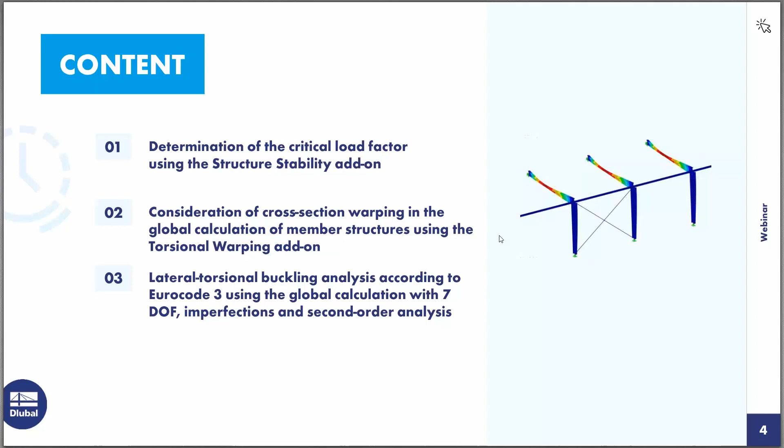So the first thing we want to look at is the structure stability add-on. Here's a short overview of its features. We can use the structure stability add-on to determine critical load factors for our structures and also calculate models consisting of member, shell, and solid elements. In this webinar, I'm going to present members in the structure stability add-on because we also want to show the combination with the 7 degrees of freedom calculation. I think shell elements and solid elements will be part of another webinar in the future.

Another feature of the structure stability add-on is the nonlinear stability analysis. We use incremental loading to also calculate nonlinear systems in the structure stability add-on. There's also an option which helps us determine the mode shape of an unstable model so that we can find the cause of the instability. We will also look at this in the webinar today. We can have a graphical representation of the stability mode shape and use it as a basis for determining the imperfections.

In the first example, I want to use a simple example in RFEM to show you the basics of the input for the structure stability add-on and also show which results we will get from the calculation with the structure stability add-on.

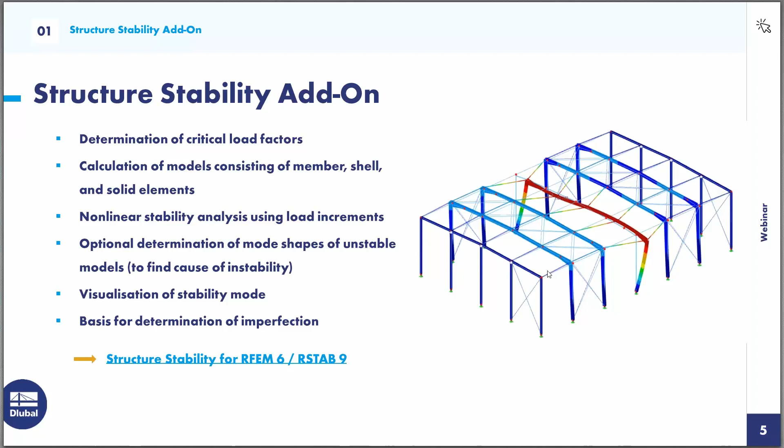So I will switch to RFEM and we will go through the first example. It's a very simple example in this case - a simple steel frame with rigid frame edges and simple supports. Now we have one loading condition: vertical loading and a horizontal load. We want to look at all the settings necessary to perform a stability analysis with the structure stability add-on for this example.

First, if you want to use the structure stability add-on, we need to activate it in the base data dialog. So I go into the edit model base data dialog, and we have a tab for the add-ons where we can activate the structure stability add-on. You've probably noticed that in the main tab of the base data, we have chosen model type 2D. So since we have chosen only this 2D model type, the structure stability analysis will also be performed in this 2D plane stress environment. We will see in the first step only mode shapes for this 2D structure.

Now that I have activated this add-on, we will see that in the data navigator we have an additional stability analysis setting. Without the stability add-on, we don't have this setting, but now it's here with already two predefined stability analysis settings. If we open the first one by double-clicking on it, we see that in these stability analysis settings, we can set all the options that we want to consider for our stability analysis.

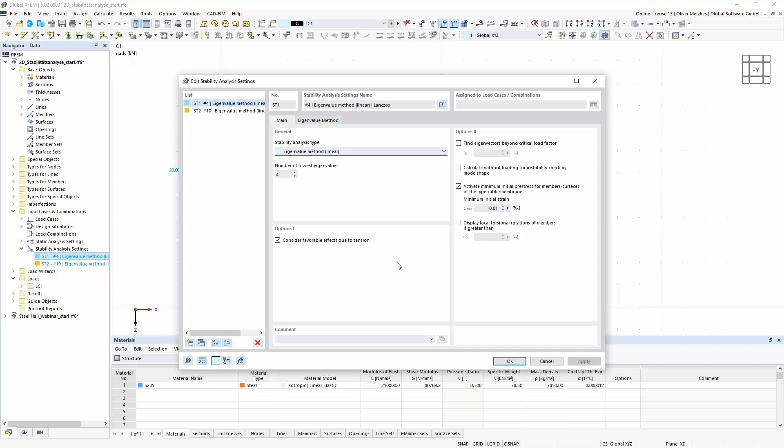We have as an important choice the stability analysis type. We have this linear eigenvalue method for determination of the critical load factor, and also, as I said, this incremental method for calculating nonlinear systems. In my example, I only want to use this standard eigenvalue method for the linear system, and I don't want to change the other options for now.

When we have our stability analysis setting, we can also assign it to our load case to start the structure stability analysis. So I can edit my load case number 1 just by clicking this Edit Load Case button, and then we see that if we have this stability add-on activated, we have an additional option here: Calculate Critical Load Structure Stability Add-on. If we activate it, we can choose in the drop-down list our corresponding stability analysis setting that will be applied for our stability analysis.

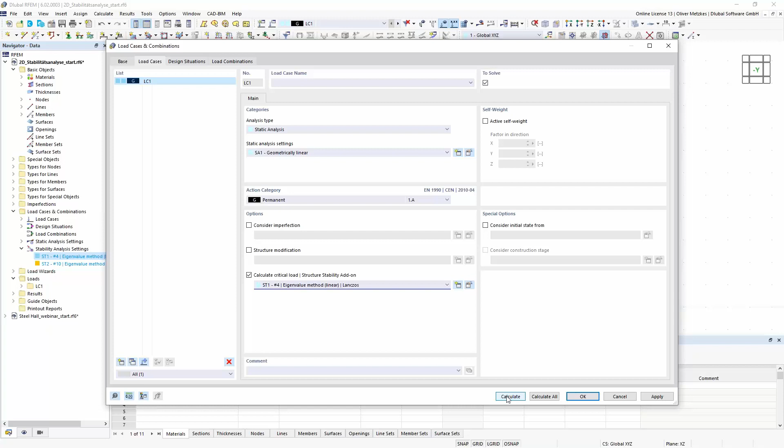If I calculate now my load case number 1, we will see in the calculation diagram that first the static analysis is performed of load case number 1, and that is used as a basis for the stability analysis. When we have calculated our load case number 1, we will get the internal forces and support reactions for the static analysis, and we can also switch to the results of the stability analysis.

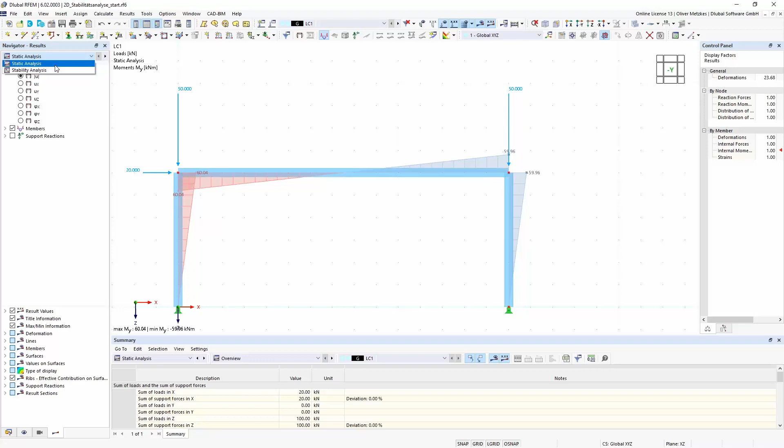In the navigator for the results, we have this drop-down list where we can switch between static analysis and stability analysis. If we switch to stability analysis, we will see the graphical representation of the mode shape, and by default for the members it's represented by line display. We can also choose the display mode.

Here in the navigator for the results we have options at the bottom, so if I choose to display my deformations for the members by colored sections, then I will also get this colored representation with the sections. That is mostly easier for the imagination of the mode shape.

I also get the results in the tables. So in the result tables for stability analysis, I will see my critical load factor corresponding to the first mode shape. For this example, the first critical load factor is 33.6. That means if I multiply the load of my load case number 1 with 33.6, I will have the stability failure with this mode shape of my simple frame.

So that is the result that I get, and I also get further mode shapes according to my setting that I have set in the stability analysis settings.

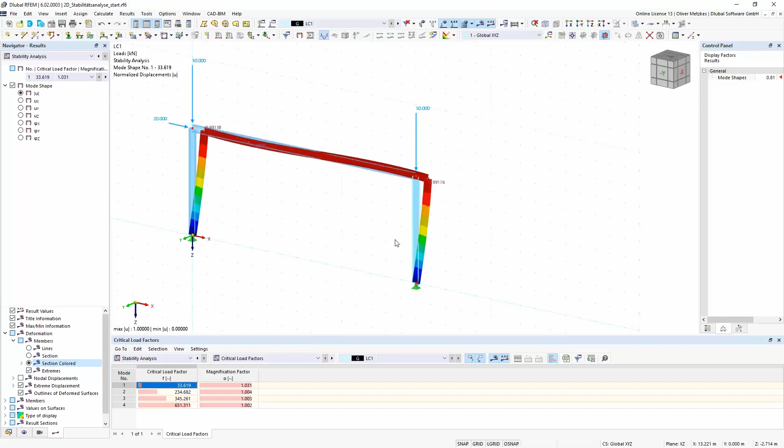Now I have said that this is only a 2D structure, so the first mode shape is this in-plane flexural buckling of the frame, and I don't get any out-of-plane buckling shapes. If I also want to consider the out-of-plane buckling, I can go into my base data dialog and change the model type to 3D. I will do so.

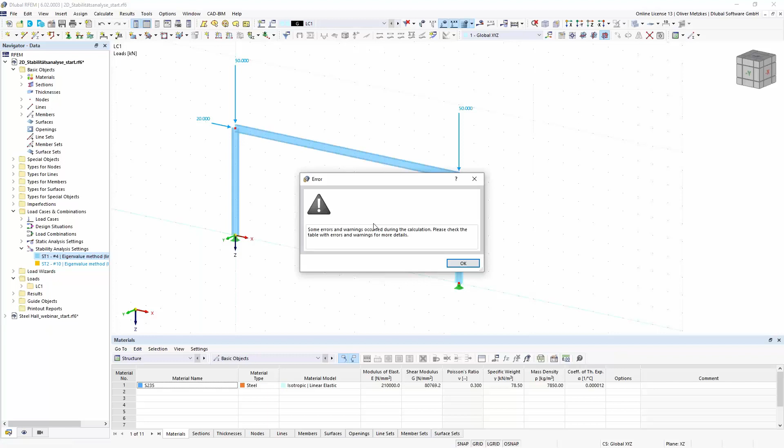Then I can try to calculate it again. I have not changed anything with my support conditions, so the result of the calculation in this 3D model environment now will be an error because the structure is unstable. For my easy structure, it's very easy to determine the cause because I have not changed my supports. I have the simple supports here, but I don't have any support in the out-of-plane direction. So for this case, it would be easy to say there are supports missing.

But also if you have more complex models and you get this error for instability, the structure stability add-on can be helpful. As I said in the overview, there's another option. If we go into the stability analysis settings, we have this option for the calculation without loading for instability check by mode shape. We can use this method if we think there may be an instability due to modeling issues, if maybe you have forgotten a support, or also if you have nonlinearities.

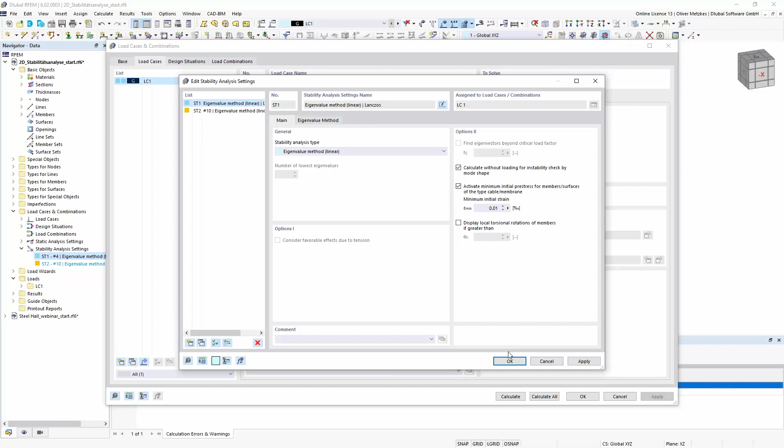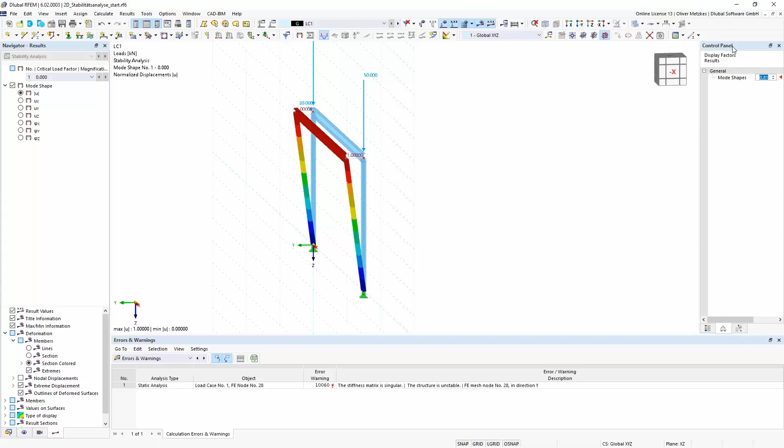This helps check if it's maybe a modeling problem that your structure is not stable, like in this case. As a result, you will get the mode shape of the unstable structure, and then you can easily see what the problem is. In my case, I don't have any support in the out-of-plane direction, so I will see that the frame will have a high deformation, and there won't be any restraint, so it will not be a stable structure that can be calculated.

Also, this option is in the structural stability add-on that can help you in case of modeling issues with instability. In my case, it would be easy, so I just wanted to place some supports here, having supports in the Y direction at the frame edges.

So I select the Y direction here and assign it now to my frame edges, here and the other one. Perfect. Now I can change the setting back so that I calculate my mode shapes with loading to get the corresponding buckling shapes. I will calculate it again, load case number 1, now also in the 3D model environment, so I would expect to get also out-of-plane buckling shapes.

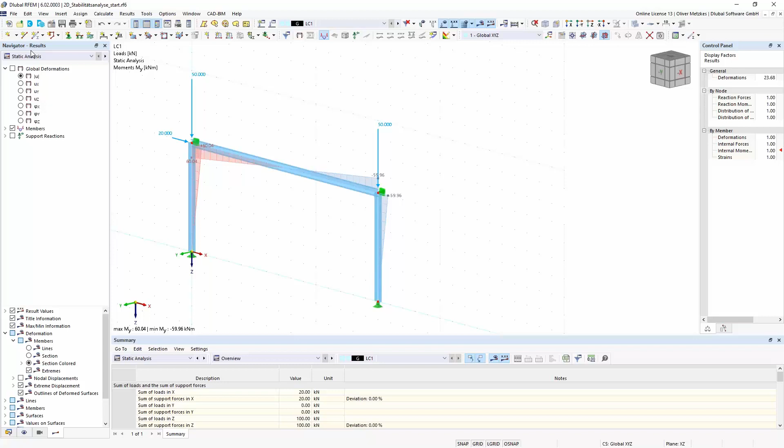I switch to stability analysis results, and now I see that the first mode shape is no longer this in-plane buckling, but now we get also out-of-plane buckling for the beam and also for the columns. For example, for this column, I now get this mode shape for out-of-plane flexural buckling with a critical load factor of 13.

So the result of the stability analysis add-on is not only the critical load factor and the mode shape, but we also get the calculation of critical loads and of buckling lengths. If we go into the result table, results by members, we will also have additional tables like effective lengths and critical loads by member. Using this load amplifier, the stability add-on automatically calculates critical loads for each member and then determines effective lengths and, corresponding to the member length, also effective length factors.

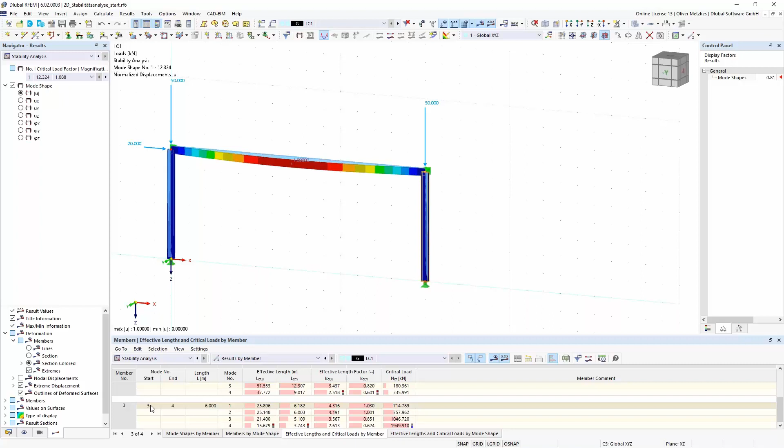So if, for example, we want to look at the effective length of this column, I click on it, it's member number 3, then we have to look also at results for mode shapes where this member is affected. So mode shape number 1 would be for the beam, but mode shape number 2 is the one for out-of-plane buckling of this column.

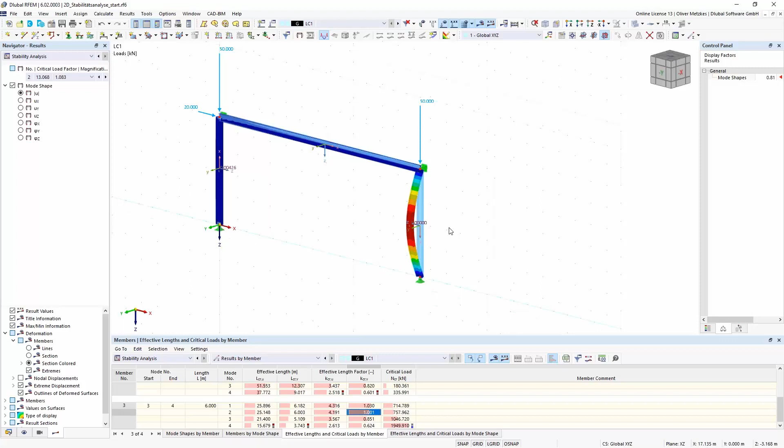So as it is out-of-plane buckling, it would be buckling around the weak axis. We can also display the axis system, so buckling around the Z axis, and the corresponding principal axis now would be the V axis. So we have to look at member number 3, mode shape number 2, and L critical V. So it's an effective length of 6 meters, and the corresponding effective length factor would be 1.0. That is as expected, as you would say the critical length for this column with hinged support conditions at start and end would be the member length.

So this would be the effective length for buckling around the weak axis. Buckling mode shape number 4 is still this in-plane flexural buckling, that would be for buckling around the strong axis. So member number 3, mode shape number 4, and now it's L critical for the U, around the U axis, around 16 meters, with an effective length factor of 2.6. Those values could now be used if we want to perform, for example, stability design checks according to the equivalent member method. Then we could also use these effective length factors for further design.

So we get from the stability analysis results mode shapes, critical load factors, and also effective lengths for the members. I think that is good. We have seen all this input on this simple example. And now I want to also give you some hints about the behavior of the stability analysis add-on in a 3D model.

So now I switch to my next model for this webinar. It's a steel hall with simple frames, so rigid frame edges, also simple supports, and standard loading. I have simplified it a bit, so I only have self-weight and snow load, and then wind loads only one per direction, so I have not considered the negative ones, for example. It's a bit simplified, but I think for our example today it's a good example.

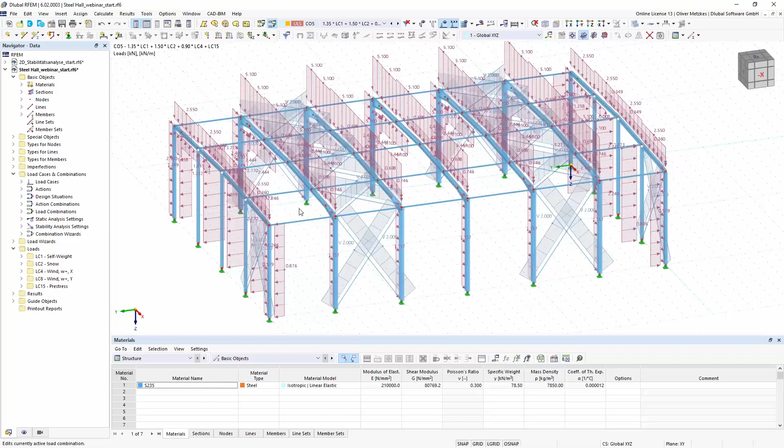Now we also have the stability analysis settings in here, and we can assign it to our load case. If we want to determine the critical mode shape, we can select a load combination where we think we have the most governing load, like combination number 5. I can also activate this calculate critical load for the structural stability add-on and calculate it. So we can assign this setting to load combinations and not only to load cases.

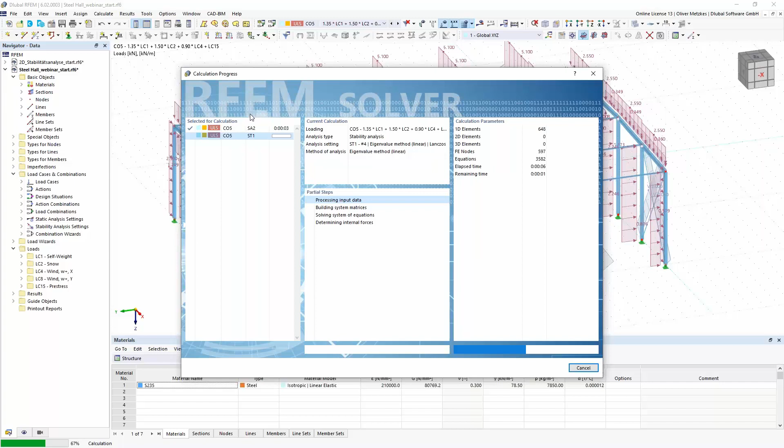So now, again, first static analysis of the load combination and then stability analysis using the internal forces that have already been calculated. So now we see the mode shape number 1 for the critical load factor of 18 in load combination number 5 is displayed here.

So now that's only one load combination. For a structure where we have lots of load combinations, it would be interesting to find out the one who would be the governing one for the stability analysis. So the wish would be to analyze the stability of all the load combinations and not only of one. That is also possible.

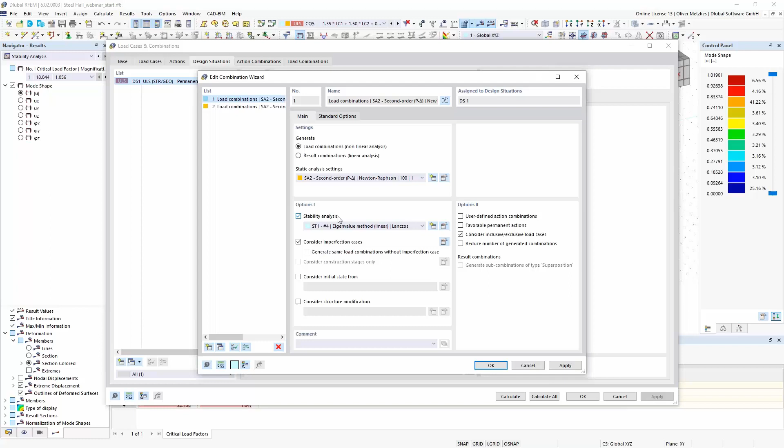So we can go into the combination of the loadings, so design situations. As you probably already know, all the rules for the combinations are set into this combination wizard. We can also modify the combination wizard, and then there's an option for stability analysis. With the activation of this option, we can also activate the stability analysis for all our load combinations that are created by this combination wizard.

So I will activate stability analysis, and I want to recreate my combinations. I set it here again. They are recreated, and we see now every load combination will have this calculate critical load option activated.

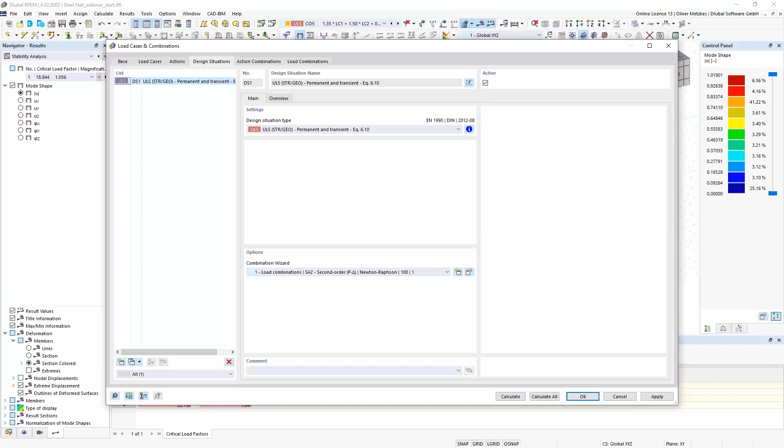If I now calculate my design situation number 1, then I will get all the results of all the load combinations. So then all the combinations will be also calculated by stability analysis. In the results, I don't have to look at each combination one by one, but I also get the results of the most critical load factor.

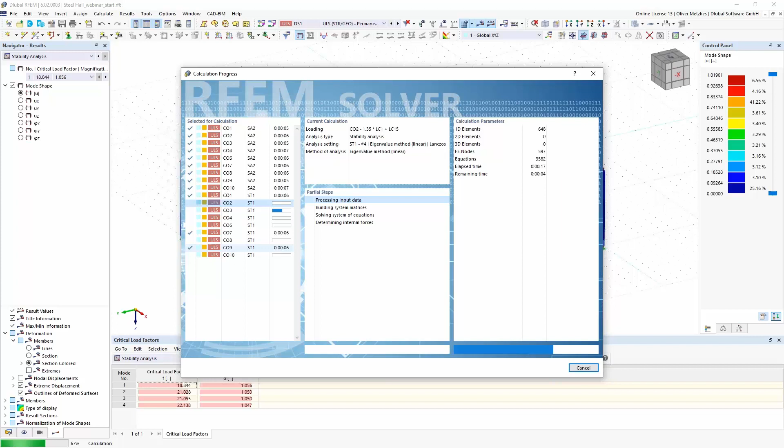So we will also look at this result in the result tables. If I am in my design situation, in the summary of the static analysis, then I will also have this additional line of minimum critical load factor. So now we see the most governing one is my load combination number 6 with a critical load factor of 11.1. And then we can have a look at combination number 6 and the results for the stability analysis.

And we will see that it's also this mode shape for in-plane flexural buckling. So that is the most critical stability issue for my load combinations that are present in my design situation number 1.

Okay, if we look at this mode shape, we see it's in-plane flexural buckling. But when we look at the internal forces, then we also know that from our loading, so there's snow load, wind load, we also get a bending moment My. So we would also expect to have here a lateral torsional buckling problem of our main beam. So we haven't seen this mode shape now from the stability analysis.

And the reason is that in our standard RFEM and RStab calculation, we only have this 6 degrees of freedom solver implemented. So also for the stability analysis, we can cover flexural buckling, but we don't get the mode shapes for lateral torsional buckling if we don't have this additional add-on activated for the 7 degrees of freedom.

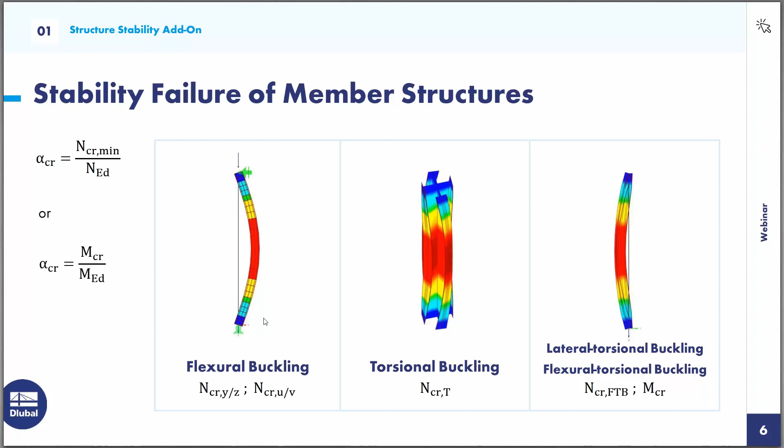That leads us to our next topic, the torsional warping add-on, 7 degrees of freedom. In general, we can use this add-on to consider the cross-section warping as an additional degree of freedom in the calculation of our member elements. We can use it also in combination with the structure stability add-on, so that we can also determine critical load factors and mode shapes for stability mode shapes like torsional buckling or lateral torsional buckling. The whole add-on is fully integrated in the programs RFEM and RStab.

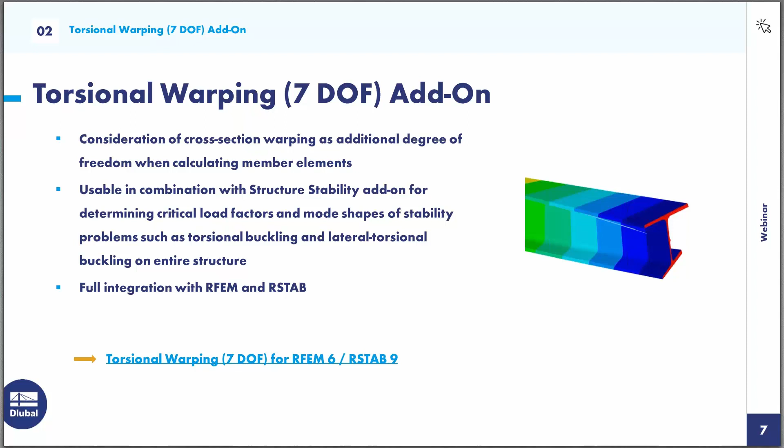For example, for channel sections, we can't use the equivalent member method according to Eurocode 3. So we would need to consider the lateral torsional buckling problem by using second order analysis with 7 degrees of freedom and also consideration of imperfections. We will also look at this lateral torsional buckling check later. We can also use this add-on to consider it in the stability analysis of the global model so that the stiffness of all the connected structural elements is considered correctly.

Okay, now I want to begin with a very simple example. The example I want to show now is a craneway girder, which I want to model in RFEM 6, and I want to show all the necessary input for the application of this torsional warping add-on. So I just want to create a new file, and it would be this craneway girder, and I want to activate the add-on torsional warping.

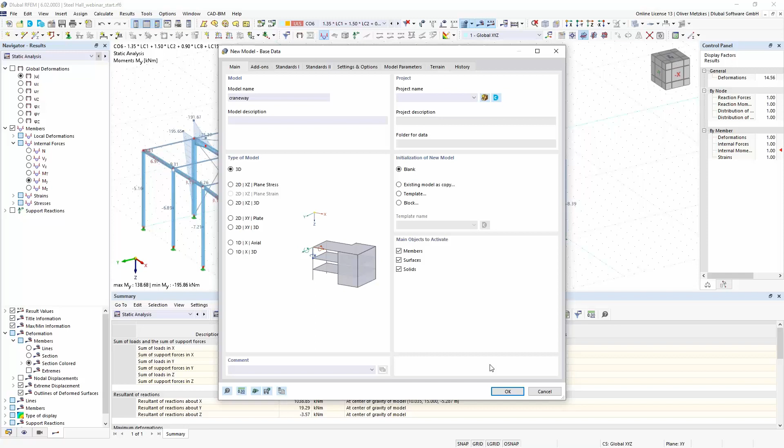As I want to calculate a craneway girder now, I also changed the load case classification for the crane race. In this example, I don't want to deal with all the necessary design checks for craneway girders, so we don't have them implemented yet in RFEM 6 - no fatigue design checks, for example, and we also don't have this moving load situation. That will be implemented later. But now I only want to show this example because then we can look at all the details for the calculation with the warping torsion add-on, because we will get these torsional moments inside our craneway girder.

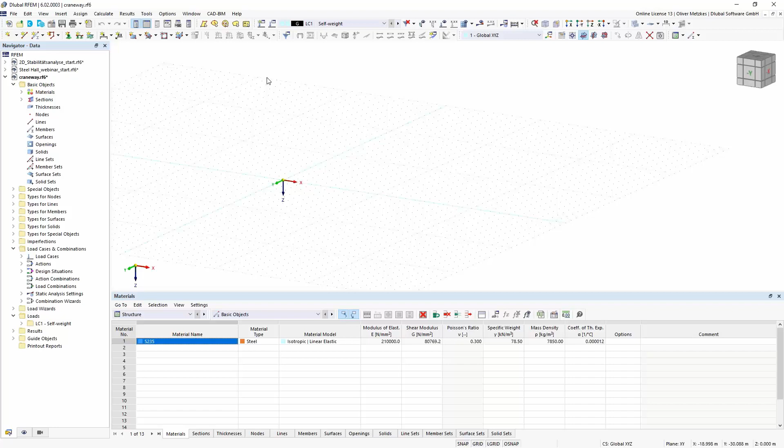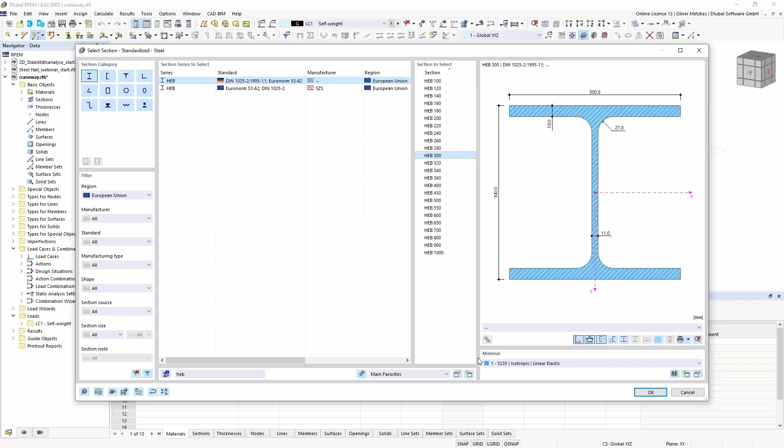Okay, it would be a very easy example for the beginning. So we will start also with an I-shaped section. I want to have an HEB 300, so I just select it from the library, and I use this search function at the bottom to have it only in my list, and then HEB 300. For the material it should be an S235, so that is already okay with the default material for me. I confirm the setting and create my member.

I want to have it with 12 meters of length, so I can just pick the points of this line grid here. Okay, so that is my member, and now I want to place supports. I want to have also a torsional restraint at the beginning.

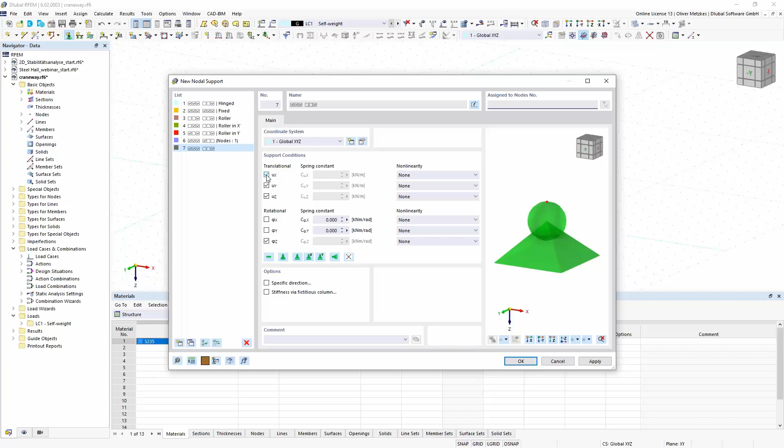Okay, so all the deformations and also the rotational restraint around the x-axis, and also another support at the end. So it will be the same, but now I don't have this longitudinal deformation fixed.

I also want to consider an additional support in the middle, so it should be a two-span beam. And now I use this function of dividing the member. So I right-click the member, then in the members I choose this divide member by intermediate nodes.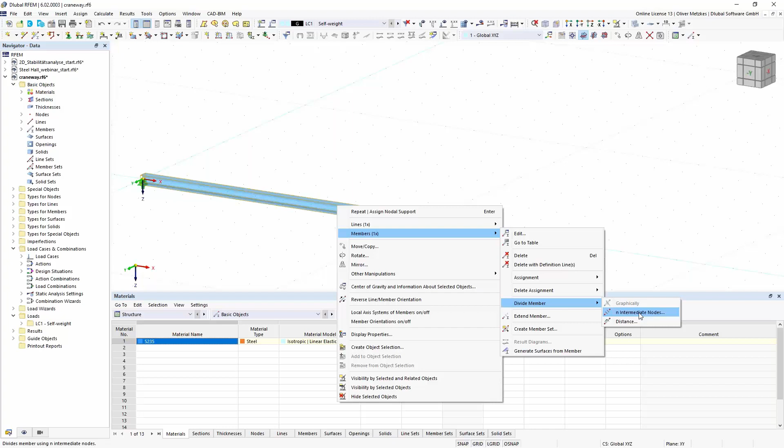I can select one intermediate node, and now I want to use this option, create on member nodes without dividing the member. That is important for the warping torsion analysis, because only if the member is considered as one member without division, then also the torsional warping will be continuous in this member. So if I would divide the member, then those two members would be independent.

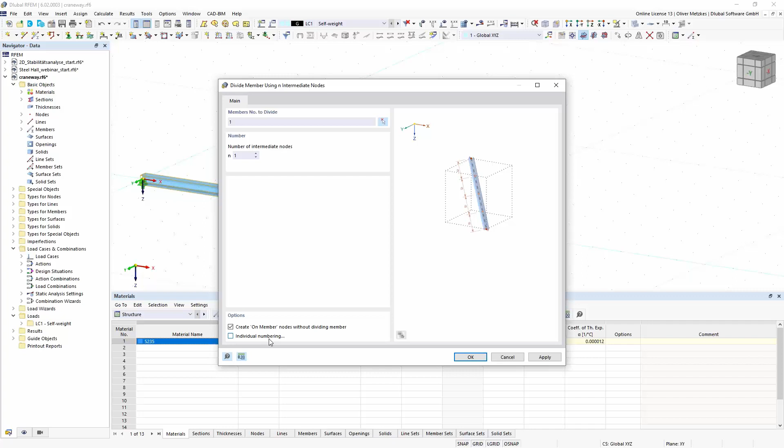We will later also look at this problem, and there are also solutions for that. But for now, I want to use this option to create only the nodes on member. Okay, so now I have this node on member, and I also want to have another support here. So I just copy this one also to the middle.

Okay, so that is my beam and also the support conditions. And probably you have noticed that in the support conditions, even if you have activated 7 degrees of freedom, we only have this 6 degrees of freedom for the support conditions. So in our calculation, we only have this torsional warping degree of freedom for the members.

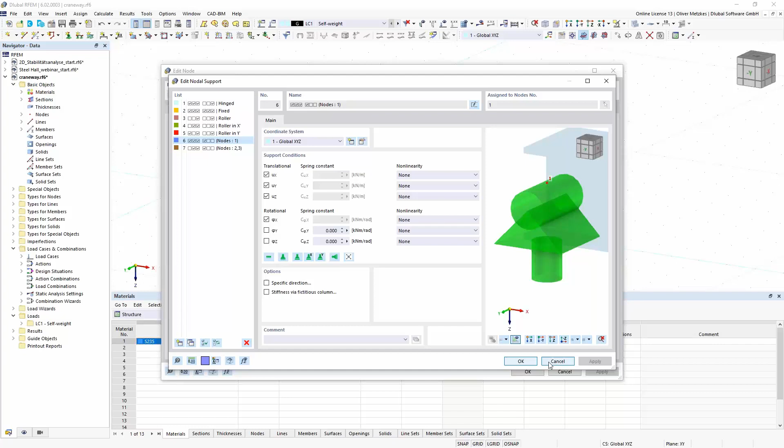So it is seen just as a member problem, and also as a member property, we would need to define warping restraints, for example. So the nodal supports, they could also be used on surfaces, for example. So we have decided not to offer the warping restraint as a nodal support, but as a member property, because it's also only valid for the members.

And for this, we can edit the member, and then we have this transverse stiffeners. So this additional tab is used to place transverse stiffeners for the design and also supports for the warping torsion analysis. So as it's like always in RFEM 6, we have this additional tab, and now we can create types of transverse stiffeners, which could then be assigned to the different members.

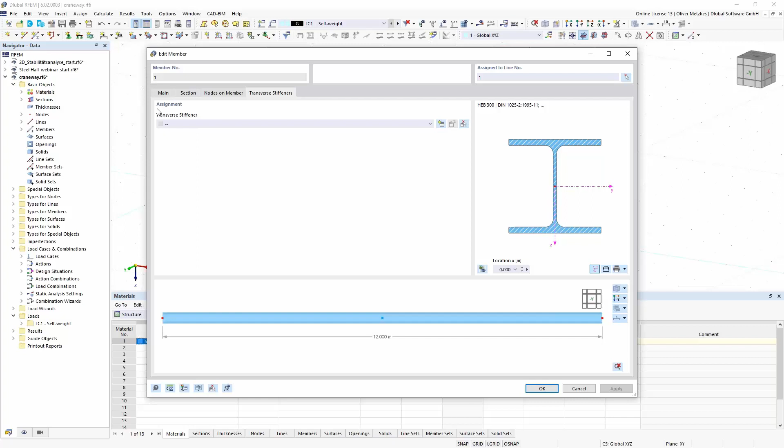So now we have this new type of transverse stiffener, and we can see as a stiffener type, we can select between different options. So we can place, for example, end plates at start at end, or also flat stiffeners, and also the warping restraint.

So in my example, I just want to place a full warping restraint at the beginning and at the end, and that is possible using this warping restraint option. So there's the user-defined restraint also available, but I want to use the full warping restraint here.

I set one at the position of 0 and then a second one at the end. So I use the relative input by clicking on this button, and at 100% of the beam length I will have the second full warping restraint.

I also want to add a flat stiffener in the middle where I have my other support. So at 50% I have my flat stiffener with a certain material and thickness, so 20 millimeter, and also the width of 120 millimeters. You see that automatically the program calculates the resulting warp spring that will be used in the analysis. So from the input of the thickness and the width, we will get automatically with the cross-section properties the warping spring that will also be considered in the analysis.

So you can use this type of member transverse stiffeners to set all the warping restraint conditions for your member. Okay, we also see a certain graphical representation. So this is the full warping restraint, and here we have our stiffener placed in the middle.

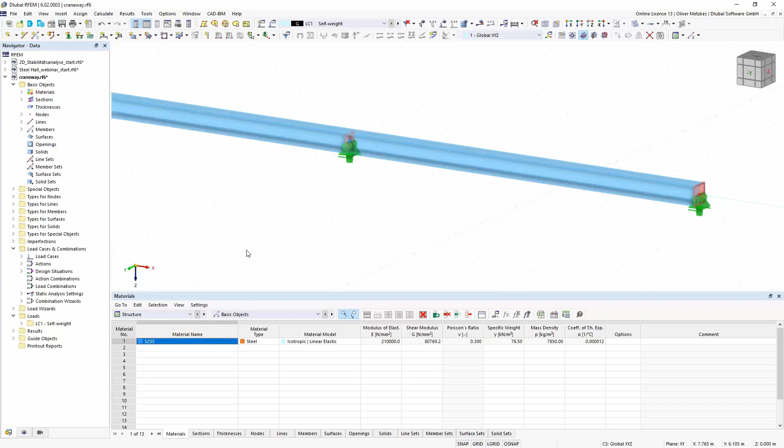Okay, so now we have our system, and we would need some loading. And in the load cases, we already have created this load case number 1 for the self-weight. And the self-weight is applied automatically by using this self-weight factor in the Z direction.

By default, if we have switched to warping torsion analysis, all the loads are applied also in the center of gravity. So also the connection between all the adjoining members and the supports, they are assumed in the center of gravity. And also the loads by default are applied in center of gravity of the cross-section. So that is a difference compared to the standard 6 degrees of freedom calculation in RFEM. So there we always apply the loads in the shear center.

But now for warping torsion calculation, this additional torsional moment is important, so now it's really applied in the center of gravity. So we have already our self-weight loading.

Now I want to also create some crane loading on my beam. As I said, we don't have this moving load implemented for now, so I could create it by hand, and I will just first show it as an example. For this craneway loading, I will use the member load, and I use the concentrated load distribution type, not the uniform one.

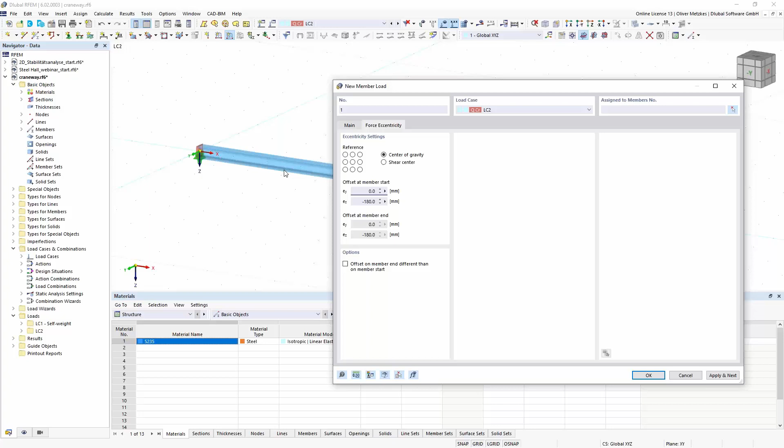But as I have an additional eccentricity, I just type it in here as a value, negative because the local z-axis is going downwards. Okay, I can just apply this load at member number 1.

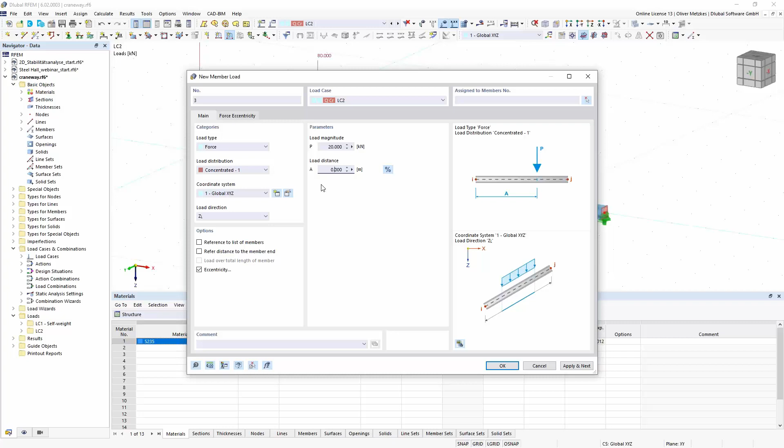And I could also apply another one, for example, a horizontal load. So just one load with 20 kilonewton at the same load distance, now in the y direction, still with the same eccentricity. Okay, so I apply it to my member. So I can create the load manually like this.

So now I would need to copy the load cases because I want to have it moving, and then also change the distances for the first loading point and the second loading point. That would be possible, but it's quite a bit of work. So I want to use another possibility here.

You have probably seen in the previous webinars that now in RFEM 6 it's always possible to use JavaScript code for the creation of the model. So if you activate the script manager, we have it here in the list, and you will also get example scripts for this creation.

For example, in the examples we have a simple beam one. If I just open it with the text editor, we will see there are also examples for creation of materials, how to create a node or a member, and for our case now, the important thing is the creation of a concentrated member load.

So you see we can create this member load by JavaScript code, also set this load distribution as concentrated, the direction for example, and a certain load magnitude. So basically all the options we have in RFEM are also available in the scripts.

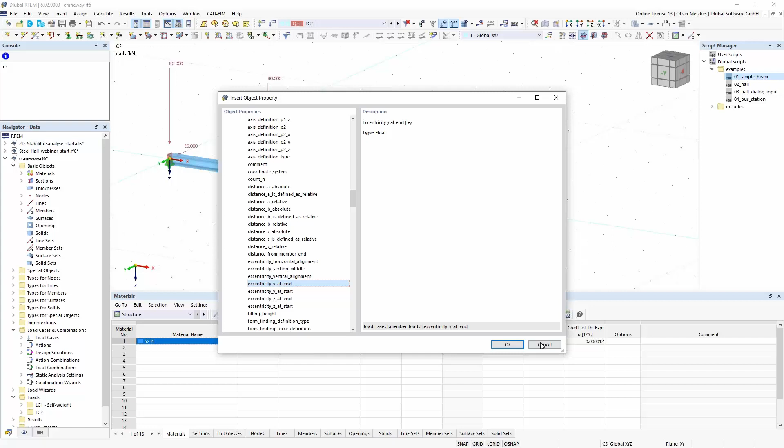And then it's relatively easy to create this JavaScript. So from this simple beam I have created another one for my simplified craneway loading here. So I have certain input data with a distance between it, and then I set my concentrated load for the horizontal load with my eccentricity of 180 millimeters.

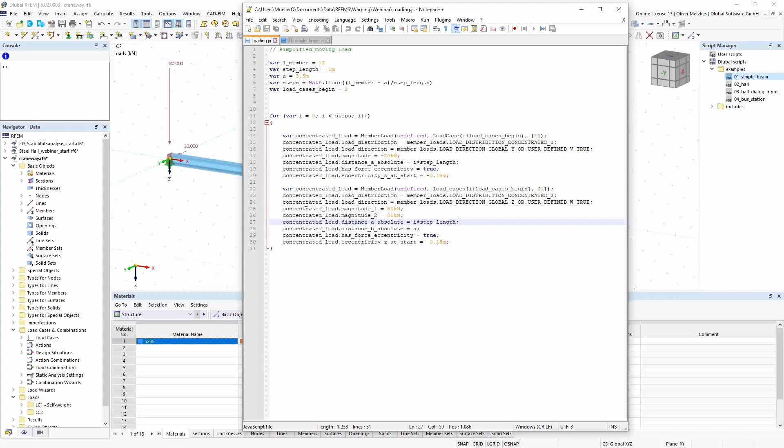And then also this concentrated load in vertical direction, as I have done manually, but now it can be done by JavaScript. So then I have this for loop that creates automatically the load cases and the loads in each load case. So I think that is a very easy method, and it's not too complicated with this simple code snippet. And to apply it, you can just copy it here into this console.

So just copy it and paste it, and then before applying it I want to delete this load case number 2 again, because it will be created by the script. Okay, and with the return key I can just start the script, and now you see in my load case list I have created those additional load cases with my member loads, and if I click through them you see it's this moving load which I have simplified, applied by this JavaScript code. So that's also an easy solution.

If you have things that you want to automate which are not implemented by default in RFEM, you can also use JavaScript

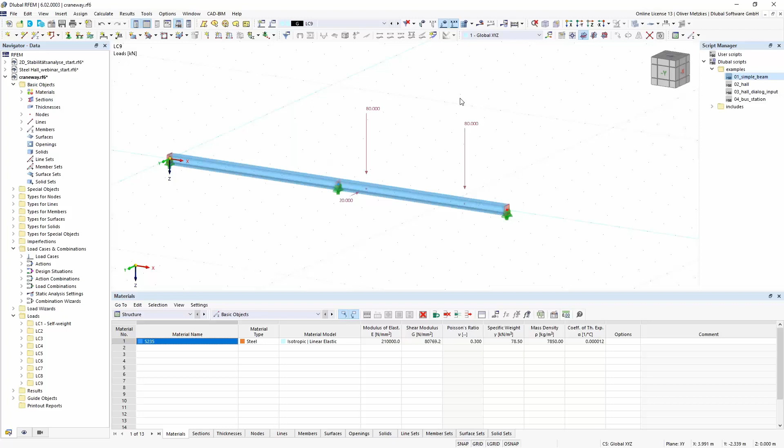to create the objects. Okay, now I have my load cases and I want to change the action category for them. So it's from the cranes and they are alternative loadings. So I will just change this action type to alternatively.

Then we have our design situations and the combination rules. I think you already know that from previous webinars, like the steel design one. So in this example, I don't want to show it in detail, and I also don't want to look at

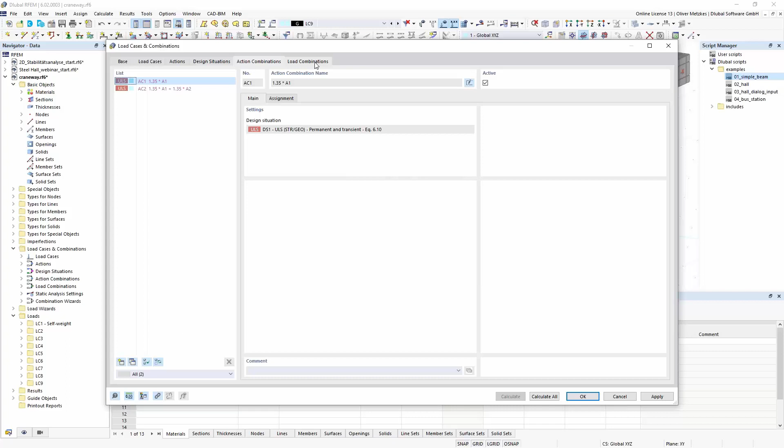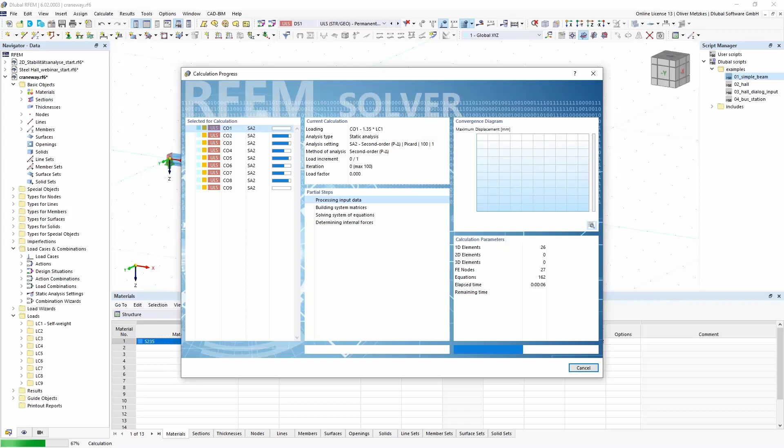the design situations for the deformations, but just for the ultimate limit state. Okay, now I have created my load combinations. So for each load step I will have this combination. If I now calculate this design situation, I will get the results for my load combinations with the warping torsion analysis activated. So we will have a look at the results, and now we also expect to get the torsional

moments correctly. So primary torsion, secondary torsion, we will get it here in the result navigator. In the internal forces you will see we have this additional choices, so the bimoment for example, and also primary torsion, secondary torsion. And if we look now for example at a certain load combination like this one, we have here our eccentric load, and so we have here this change in the secondary torsion because this load is applied.

Also the warping deformation, we will get it as a result in the local deformations. Okay, so now we have calculated our load cases, and that could be used now for the steel design, for the cross-section design, without the stability analysis.

If we now also want to perform our stability analysis, so in this case it would be a lateral torsional buckling check, we want to consider also the torsion correctly, so we would need this add-on with 7 degrees of freedom, a calculation according to second order theory, and also the imperfections. So that would be then our lateral torsional buckling check.

So in this case, I want to create the imperfections from the stability add-on. So I want to use the mode shape and scale it to a certain value that I can easily create my imperfection. So we close this script manager again.

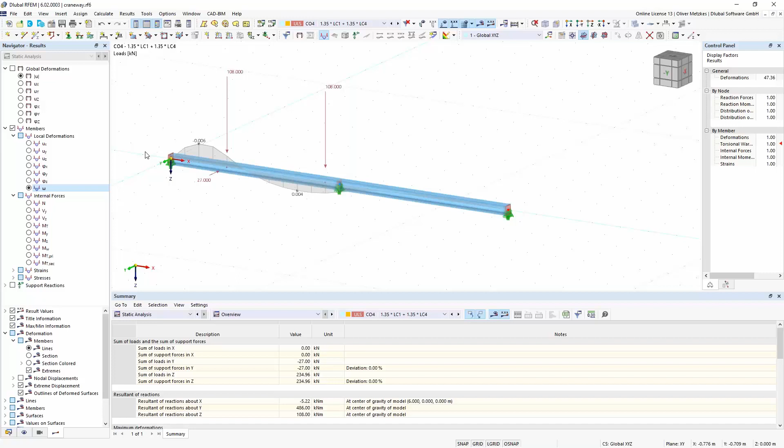But in my example, it would be easier to create this imperfection out of a mode shape, for example, of my self-weight load case, because then I would have this symmetric mode shape which I would need for my imperfection value. So in this example, I just want to apply it for this self-weight.

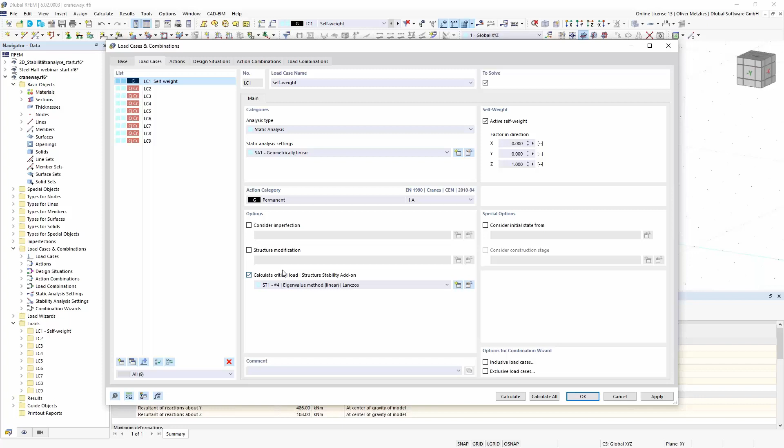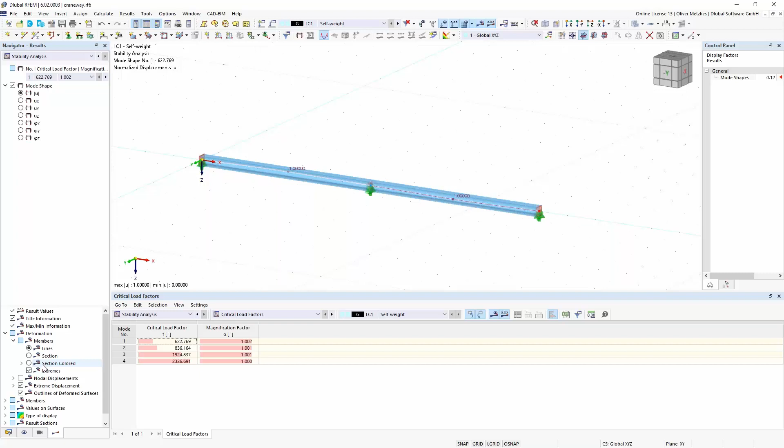So I activate this option, calculate critical load, and then calculate my load case number 1. And as we have now activated the torsional warping add-on, we now also expect a lateral torsional buckling shape. So not only flexural buckling, but we will see it here if I activate the deformation by colored sections. Okay, and then we see now with the 7 degrees of freedom add-on, we get this lateral torsional buckling shape.

And now I want to use this one to apply it as an imperfection. For that, I can go into my navigator data and create a new imperfection case. So in this imperfection, I right-click the imperfection case to create a new one.

And if we have the stability analysis add-on activated, we also have the imperfection type of the buckling mode that we can use. If I create imperfections from a buckling mode, I first have to select the load case. So in my example, it's load case number 1 and also buckling mode number 1.

And now I need to set the imperfection magnitude. So for our lateral torsional buckling design check, the standards are giving also imperfection values. So in the Eurocode 3, you will also get imperfection values for flexural buckling and also for lateral torsional buckling. And now you could also apply this imperfection.

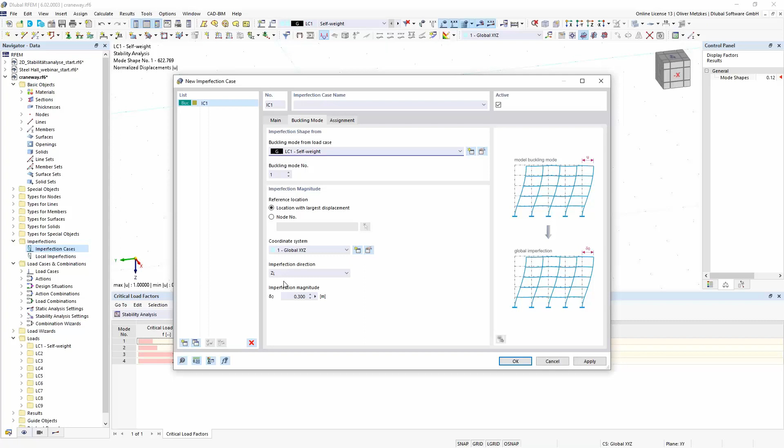In my example, as an imperfection value, I can use 1 per 200 of the reference length, which would be between the fork supports in this example. So this length and 1 per 200 of this length will be the imperfection value that I would need to use here. It also depends on the national annex for the Eurocode.

So it's always important to look at the national annex of your country so that you can set the correct imperfection magnitude. So if I want to set it here, I choose the imperfection direction in the Y direction, and then I could manually calculate the imperfection magnitude, or again I could use the formula input, and also in these formulas the JavaScript code is allowed.

So now I can also get the properties of all the RFEM objects. For example, from my members, it's member number 1. I can also get the length information here. So it was 12 meters.

And now I want half of it because the support is in the middle, and 1 per 200. And so this imperfection magnitude would be the value that I should use. Okay, and if I now change the member length, for example, also this value would change because it's defined by the formula.

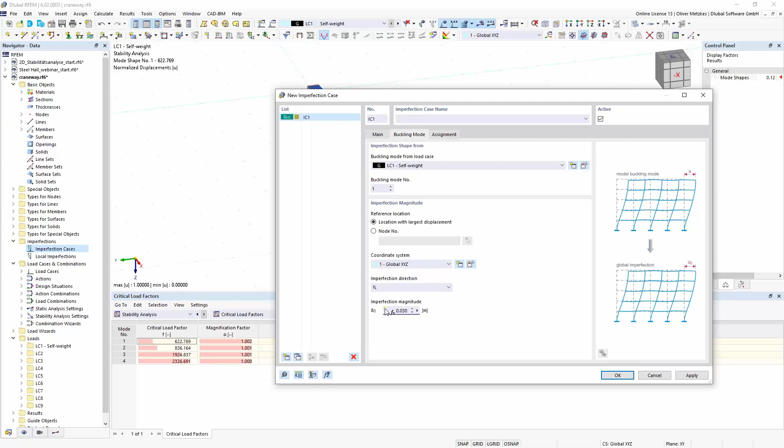Okay, in my example, I would also need to check the imperfection in the positive or in the negative direction, depending on the load case which I analyze. And as I want to analyze all my load combinations, I want to also set this imperfection in the negative direction. So that can also be easily done using this group of imperfection cases.

So this imperfection type can be used, for example, to combine different types of imperfections. So if I, for example, have a global initial sway imperfection in the x direction and then want to combine it together with local imperfections like the one I have from a buckling shape, then I can do so in this group of imperfection cases just by adding additional lines and setting a certain operator.

But in this case, I just want to use it for applying my imperfection case number 1, but with factor -1 so that it's just in a negative direction.

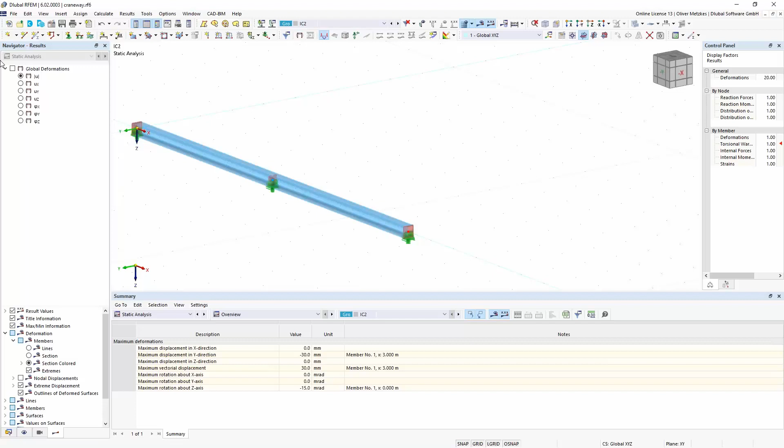Okay, I can also display the shapes of the imperfection cases. So if I just calculate this imperfection case number 2, then it takes the mode shape of load case number 1, scales it to the value, and as we have the negative factor, we will have it in a negative direction. And then we can look at the results for the global deformations.

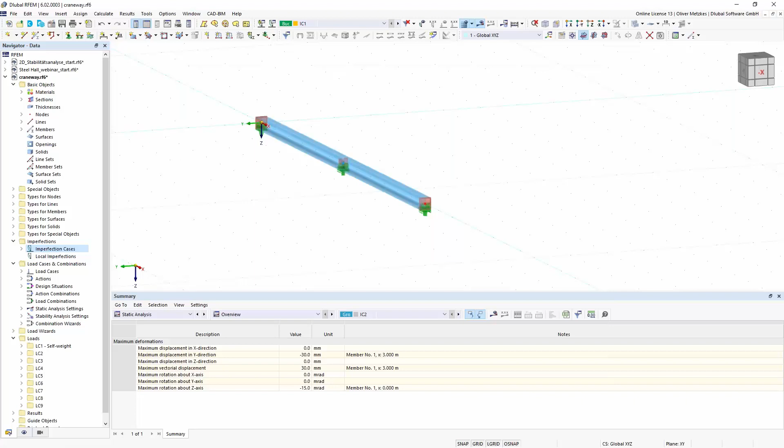So this is my imperfection shape now in imperfection case number 1, and it was in imperfection case number 2. And now I can also calculate it for number 1. And you see it's just the opposite direction with the imperfection magnitude that I have set in the imperfection case, case 1 and 2.

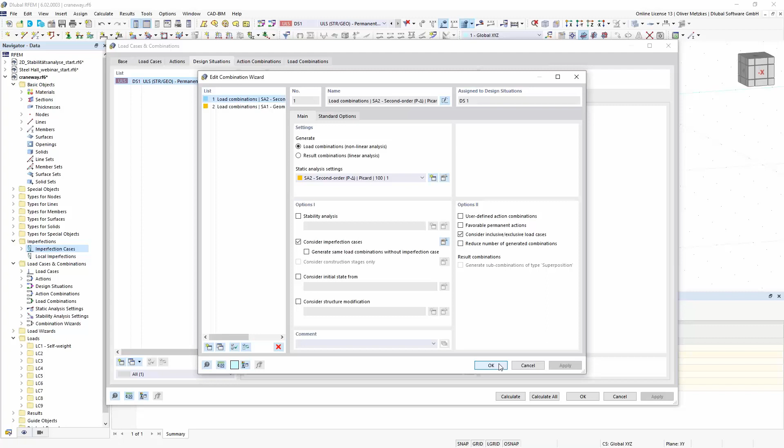I can now use the imperfection in the combination. So in my design situation number 1, if I look at the combination rules, so in the combination wizard, I can here activate my imperfection cases, and then they are also considered in the combination. So if you look at the load combinations, we see now we have the same loading one time with imperfection case number 1 and then imperfection case number 2 and all the load cases.

So now if I calculate this design situation number 1, then I will get the internal forces calculated by second order theory with the imperfections and also the warping add-on activated. So I could use this internal forces in a cross-section design check, and that will replace my stability design check for lateral torsional buckling. So that is possible according to Eurocode 3, and then I could use those internal forces.

So all the internal forces I get now in this design situation number 1 can then be used also, for example, in stress-strain analysis add-on or also in a steel design add-on. So I want to show that before.

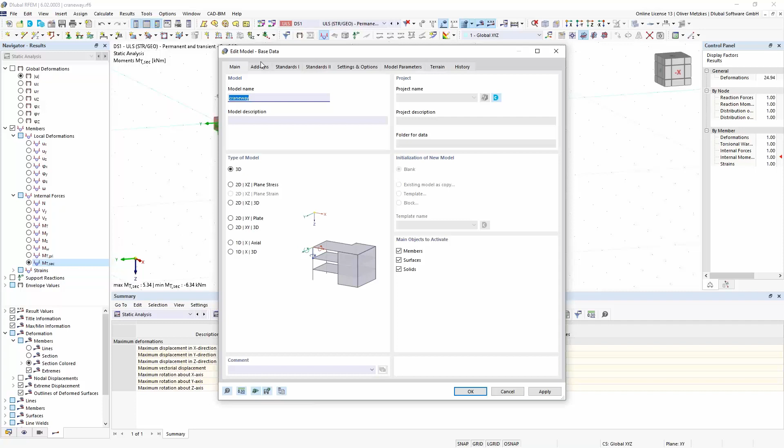So if I just activate my steel design add-on in the base data dialog, so maybe it's also a good idea to just save the structure. Okay, I just saved it. And then I activate my steel design add-on, and I can look also in the input tables. I think you already know this input from the steel design webinar.

So we have our design situation where all our internal forces are considered. Then objects to design, materials and sections. That is automatically overtaken from the RFEM definition. And the important thing now for our cross-section design check, if you want to use it as stability design, we need to look at the ultimate configuration.

So if we go inside here, we can activate this option, to perform the stability analysis with the second order internal forces. So we would now need this partial safety factor also for stability design. Normally cross-section design checks are performed with the partial safety factor gamma M0, but for stability design checks we would need the gamma M1 partial safety factor. Depending on the national annex, this factor can be different. So we need to activate this option.

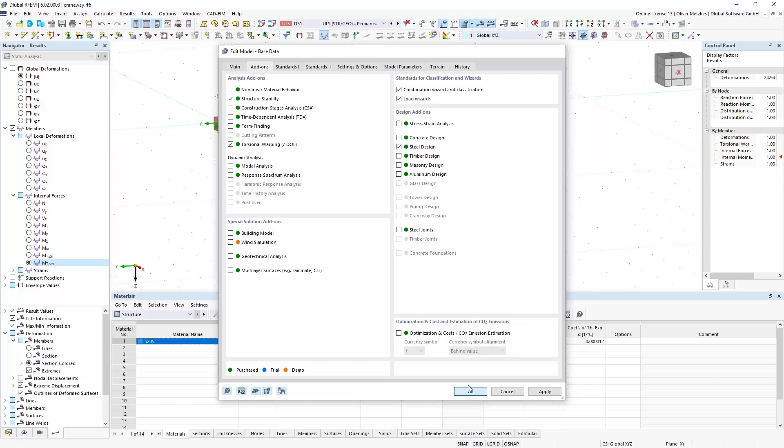And also we don't need any other stability design checks, so no need to perform the equivalent member method again, because we already have all the effects in the internal forces. So now this setting is applied to our member. I see the add-on is deactivated again, so I will activate it, steel design, but I think all the settings have been made. Yes, okay, so this is the correct setting with this gamma M1 factor. And now I can also calculate my steel design.

And then I will see all the steel design checks with consideration of all the internal forces, including bimoment, secondary and primary torsion. So if we look briefly at one of the design checks, for example the most governing one here, we see in the results we are calculating the equivalent stress, considering the stress from bending moment about strong axis, weak axis, and also the axial stress from the warping bimoment. So all the necessary internal forces are included, and we also use now this gamma M1 factor for our cross-section design check, because it's meant as a replacement for the stability design.

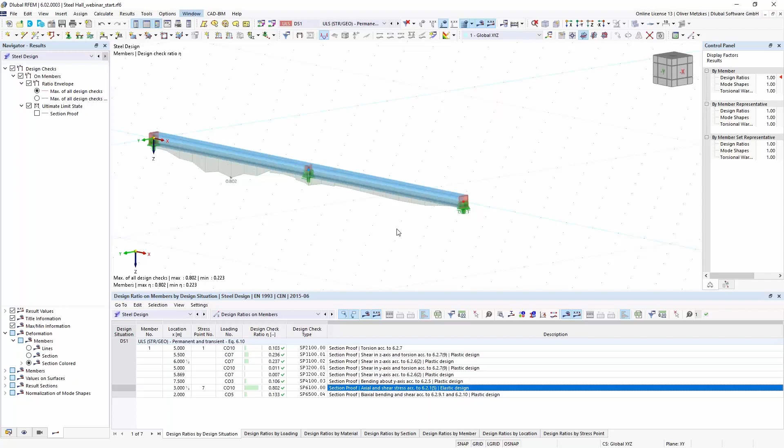Okay, so I think we have seen now how to consider the 7th degree of freedom on this simple example and what we would need as an input. And now I think we can look again at our 3D model. So I will switch back to the steel hall that we had before, and now we also want to check the lateral torsional buckling on this global model.

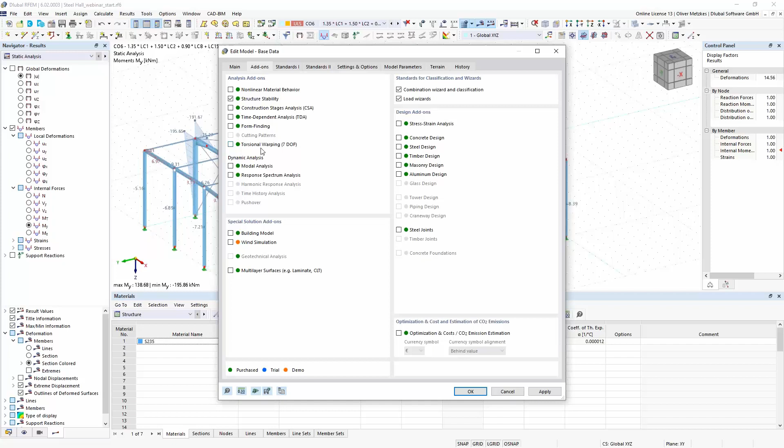So for the beam girders, we would now also expect to get these lateral torsional buckling shapes. So first we need to activate the structure stability add-on. We have it already, and also the torsional warping add-on. Now I just want to give you some additional hints, because if we look at this model, as we have said, all the members are by default independently for the warping.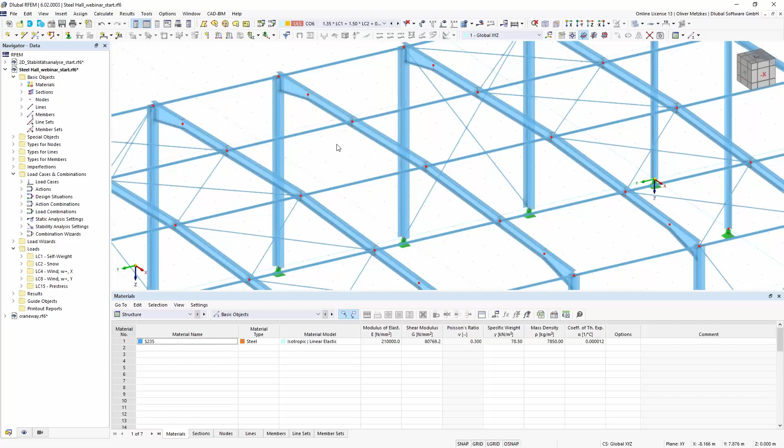So all the members are free at their edges for warping. And now we still want to see these beams as a continuous one, so that the warping can be continuous in the whole beam. Therefore, we would need to create member sets. That is the option if you have members which are not connected. So if you don't have internal nodes, but real nodes, you can still consider them for continuous warping if you create member sets.

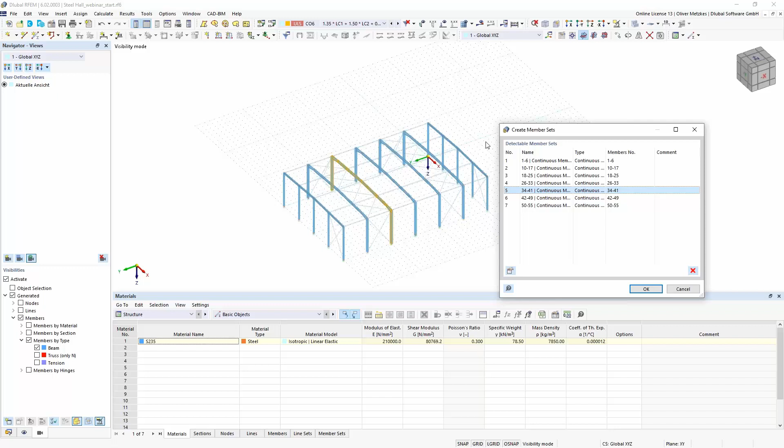So I will create the member sets. For that, I will activate my visibilities for the members to only get the beam ones. So then I can select all the frames easily, and I don't want to have these additional columns here. Oh, so this one. Okay, and I just right-click on the members, and here I can create the member sets. It automatically recognizes that I have independent systems here, and it tries to create the continuous member sets. So you see, I can now easily create the member set for all the frames.

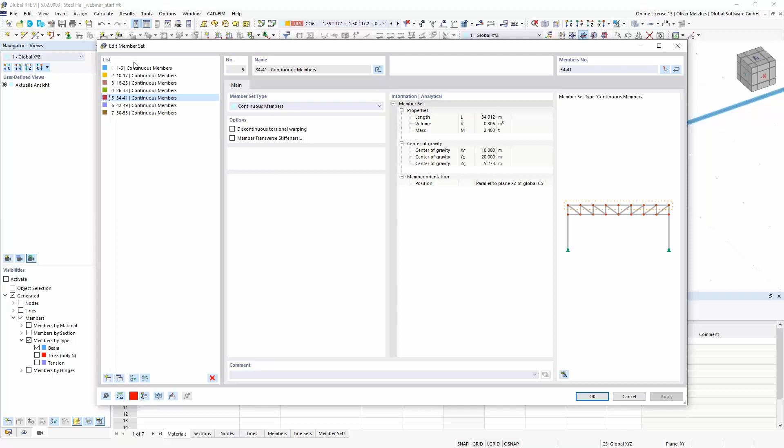So that is possible now, to consider those members also continuous in the warping, because that is the property of the member set object. If you don't want to have it continuous in the warping torsion analysis, you could also activate this discontinuous torsional warping. But normally when you create a member set, it is meant to have it as one structural object, so you will have continuous warping for all the members which are connected in one member set. Okay, so that is the first important thing, that we can consider this beam as a continuous one.

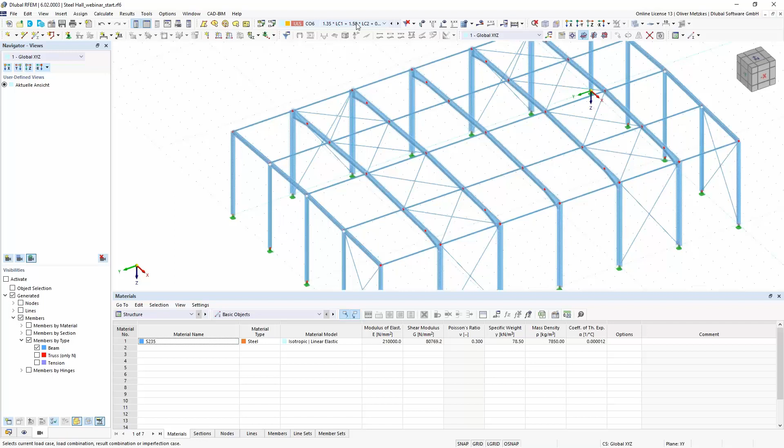And then we already also know that the load application point needs to be defined by the force eccentricity. So in this example, I just want to change the force eccentricity for this node load, to also apply it at the top flange. So for the 6 degrees of freedom calculation, it was not necessary, but now if I want to consider it in the warping torsion analysis, I also want to consider this eccentricity in the stability analysis.

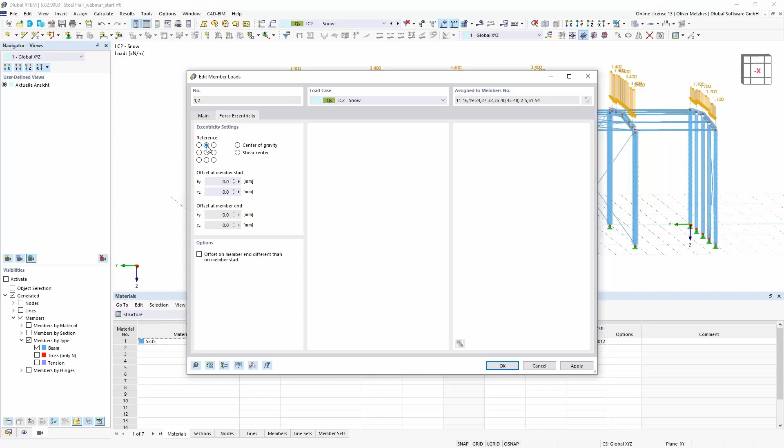So I just added my member loads and set this eccentricity value here. In this case, I can use this simple reference point because I just want to apply it at the top flange of the cross section for all these members. So I can use this simple reference point.

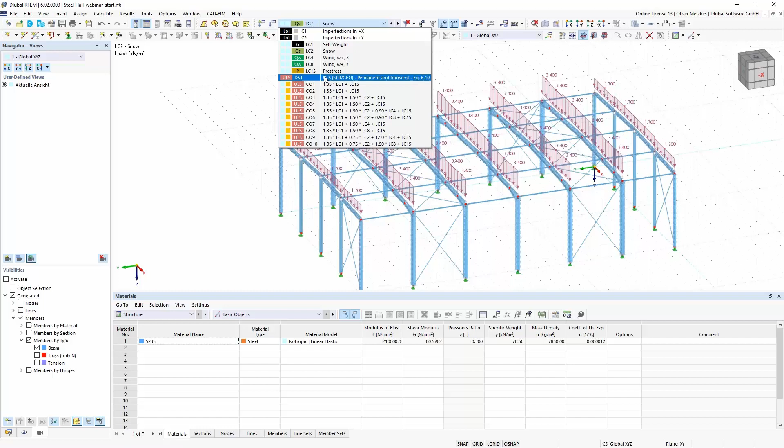Okay, so now I have changed those two settings, and I want to run now the stability analysis. I think we still have it activated from the example before, so if I calculate my design situation number 1, I have my 10 load combinations, static analysis, and then stability analysis.

And now I would expect to also get this lateral torsional buckling shapes. So before, it was only the in-plane flexural buckling, you probably remember. And now I want to look at the most governing mode shape, which would be lateral torsional buckling.

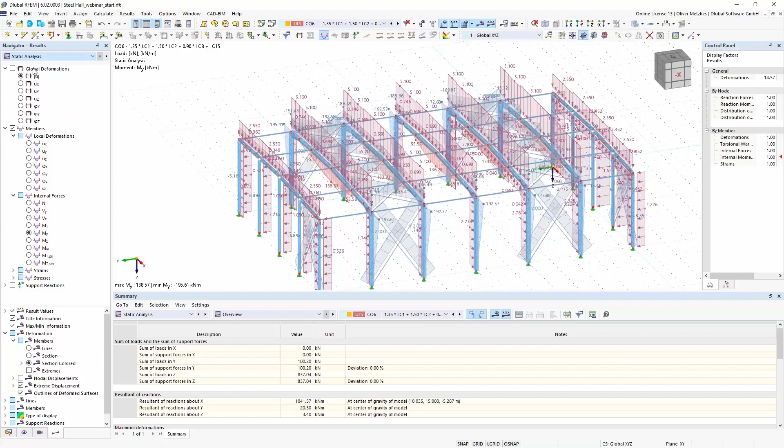And automatically, as we are working now in a 3D model, the stiffness of all adjoining elements is considered - already the bracings and all the couplings between the members are correctly considered. And so we get this critical load factor. So we can also do detailed stability analysis on a 3D model.

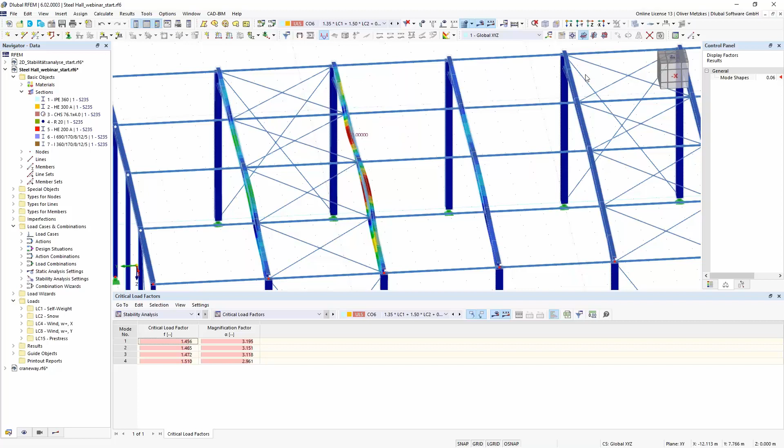For example, to consider also the coupling between beams that are not equally loaded, to also consider the stabilizing effect - you can see that the structure is considered. For example, in this example I changed the section of the bracing from a round section with 20 millimeters of diameter to one with only 10 millimeters.

So in this example, I will just rerun the stability analysis now with bracing that has a lower stiffness, just so that you can see what we will get as a result.

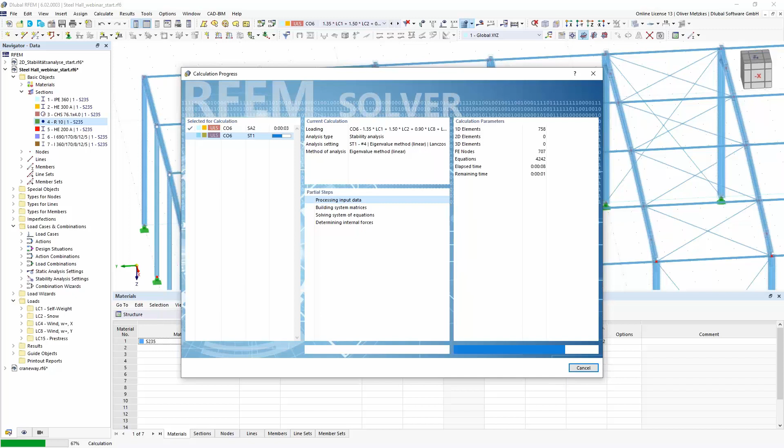So in this load combination number 6, before it was this lateral torsional buckling between the fixation of the bracing. But now we have a lower stiffness, and now it's not stiff enough to prevent this flexural buckling of all the frames. So now we have a lateral torsional buckling mode shape with critical load factor 1.1.

So the first one is now the most critical one with this lateral torsional buckling mode shape, not between the bracing fixation, because the stiffness is too low now. So we will have this global lateral torsional buckling here. You can see that this stiffness is directly considered for all the adjoining elements, and there's no need to calculate a certain equivalent spring stiffness, for example, in this 3D analysis.

So you can use this combination - stability as a structural stability add-on and torsional warping add-on - also to perform detailed stability analysis on 3D models with member elements.

Okay, so I think those were the examples that I wanted to present to you with the two add-on modules. Now I can give back to Andreas.